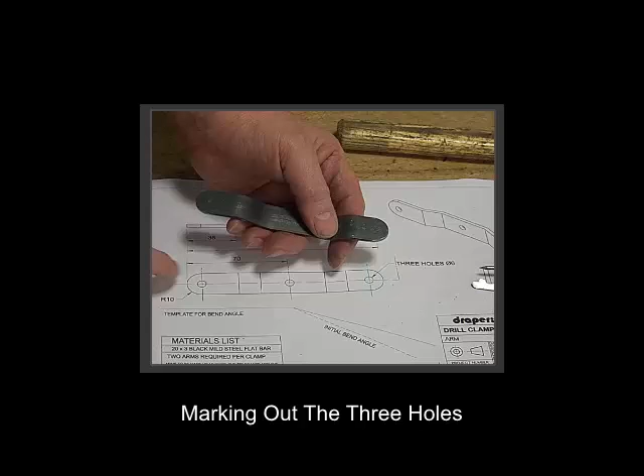This drawing is full size. It says there scale 1:1, and we can see that that does in fact just fit over there very neatly. Where I've used the center punch to mark the radius for the two ends, then that is going to form the center punch mark for the hole at each end as well. It says that's R10 for this radius.

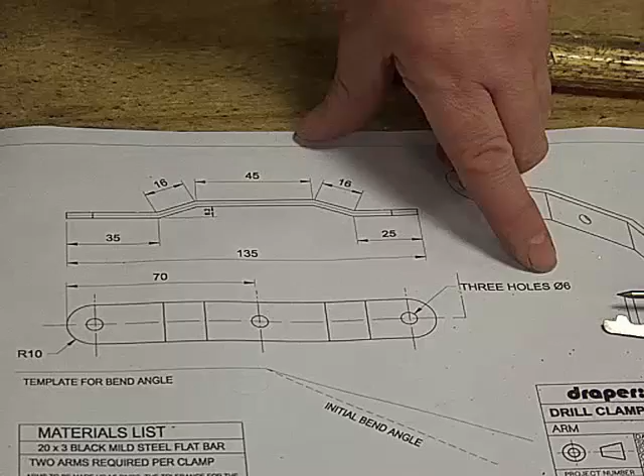Over here we've got 3 holes, diameter 6, which is obviously that one, and the one which is slightly off center. So it's 70 there, a little bit closer to one end. So that is the R, see marked out. Now, how are we going to mark out this hole?

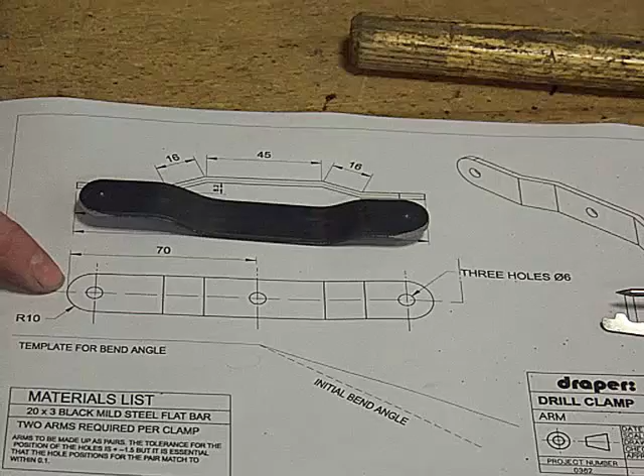Well, it says there that that hole is 70 from the very end, which means from there to here in a straight line, that would be 60. But we'll have to remember that this part here and that part there, it's slightly different heights. So although it's 70 in a straight line, it is in fact going to be very slightly more.

We get a ruler and dividers, and we'll set these. You can actually put them into the engraving on the ruler. Put on the 200, 270, so that is 70 part. But do remember, it's 70 to the very end. We only wanted to go to there, so that is 10 away from there, so that's less 10. So we'll take that down to 260.

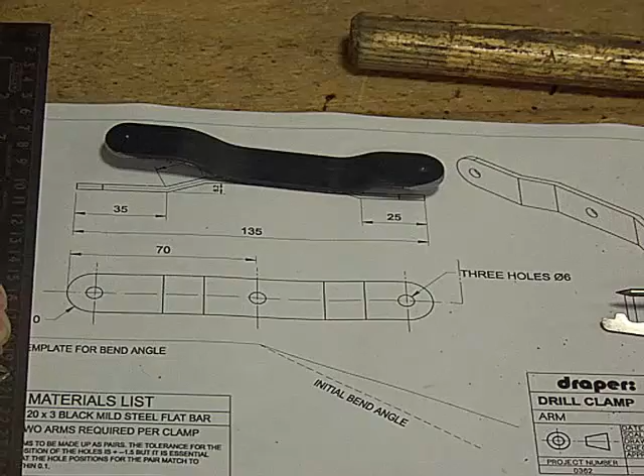Check that's correct. 260. So I can put, remember this is the 35mm end, so let's just check. I have got the 35mm, that's the 25, so put the dividers into that center punch mark, straighten out there.

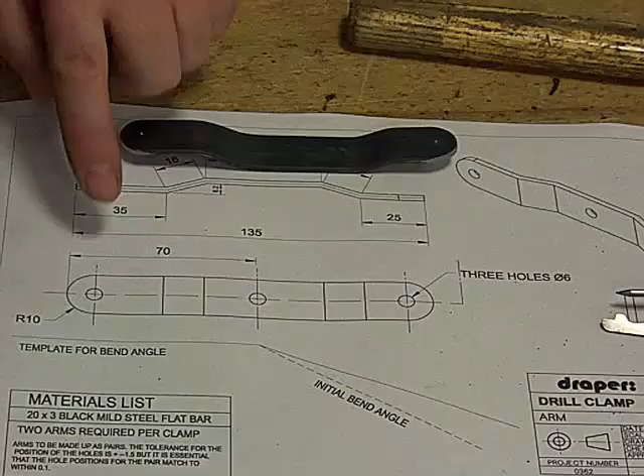If it's 70 from there to there, it's 135 all the way to this end, then it must mean that from there to there must be 65, and from there to there it must be 55. So if we set the dividers to 55 and put it on that center punch mark,

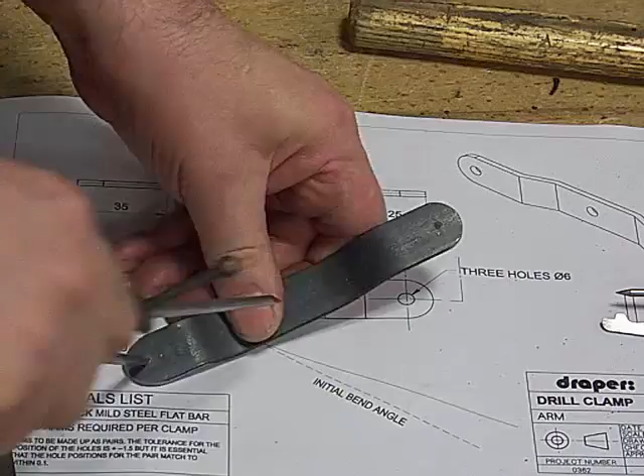strike an arc, we can see that the two marks are very slightly apart because, as I explained, they are at different heights, so I would have expected a slight gap in between. So what that tells me though is that the position where I need to mark that hole is right in between there on the center line.

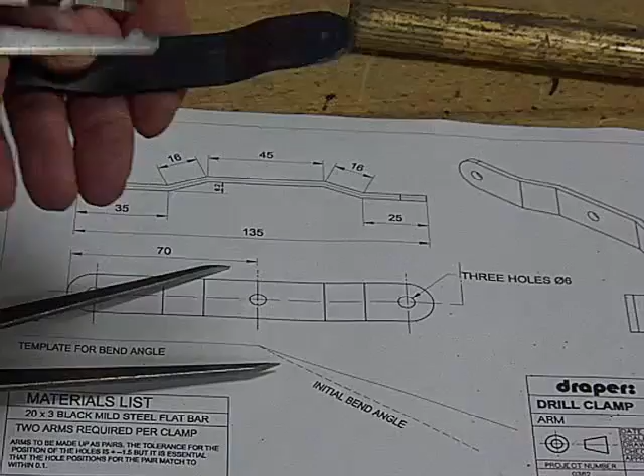So you're just using your odd leg calipers, mark there and a mark there, so hopefully we can see it's right in between. Almost got a little rectangle to center punch in between. Put it on the back of the vise. Hold that slightly to one side. One firm hit, so now I've got the 3 holes marked out, and I'm now ready to drill it.